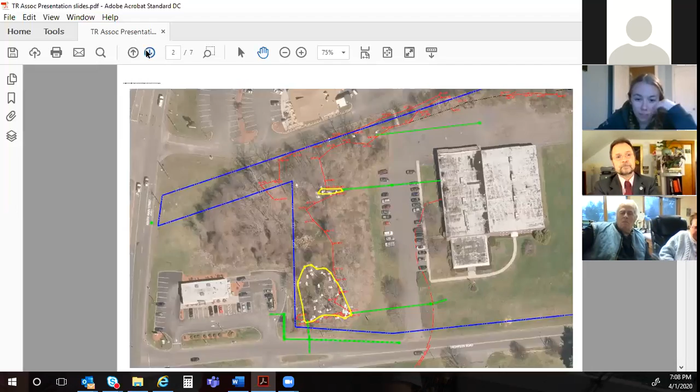I'm just going to interrupt for 1 second. Dick and Kathy, can you guys just mute yourself? What? Can you mute yourself? We're just getting some background noise. It could be the scanner. Hold on, please. Just mute it on the computer. I don't know how. I'm lucky to get on this stupid thing. At the bottom left corner, there's a little microphone. I didn't even know you could hear me. What kind of background noise, please? Why don't we shut the scanner? I can hear you guys talking every now and then. I didn't know we were on. Yeah, the bottom left corner of the Zoom meeting, there's a little icon that's a little microphone. If you just click that, it'll mute yourself. And then just remember, next time you start talking to us, just unmute yourself. Okay, we don't have that up here. I don't see it. We'll just shut up. Okay. You're diplomatic. Sorry, go ahead. You have to lower your cursor to a lower part of the screen.

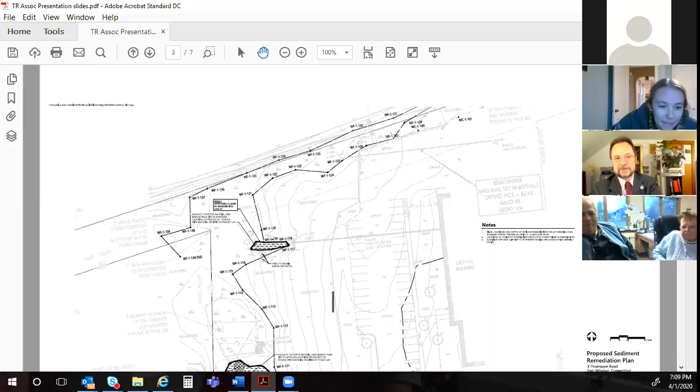All right, so continuing on here, this is sheet C3 in the plan set from VHB, and this simply shows those same 2 areas where we're proposing to excavate, and the patterning on the ground within those 2 areas corresponds to depth. Okay, so the upper small area is 6-inch excavation proposed. And the larger area ranges from 2 feet, which is the crosshatch pattern in 3 points of the triangle, if you will. A 1 foot excavation, which is the diagonal shaded area, and elsewhere it's 6 inches. So again, like I said, it's a classic pattern that geologists look for of deeper at the outfall of the pipe, and it shallows as you move downstream. And there's a couple of anomalies that you typically have, but nonetheless,

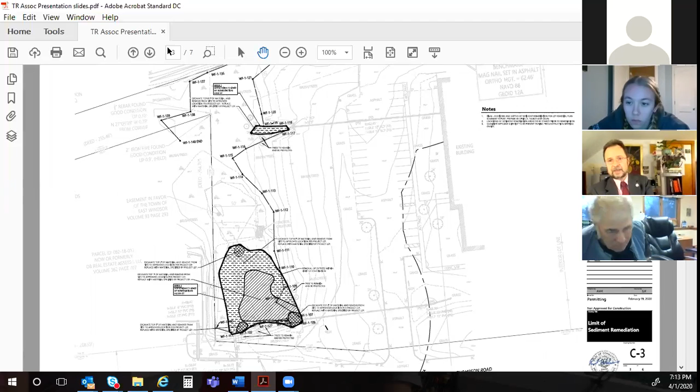And then finally, removing the erosion and sedimentation controls. So at that point, I'm going to end my opening comments and ask Jeff to continue, please. Okay.

So I'm Jeff Shamus with VHB. I'm a certified professional wetland scientist, soil scientist, and certified ecologist. And as Paul mentioned, I did the delineation out here. And if I'm looking away from the camera, it's because I have another screen where I actually have what I'm sharing. So I'm looking at the plans.

And so the delineation was done and is outlined in this black boundary. On this plan, this is a tree inventory plan. We've identified the remediation areas as well, the same locations. And so to understand what we wanted to do for mitigation, knowing that this was going to be all done in the wetlands and there was going to be tree removal and so on, I wanted to understand what trees were coming down, and I thought maybe the commission wanted to know this as well.

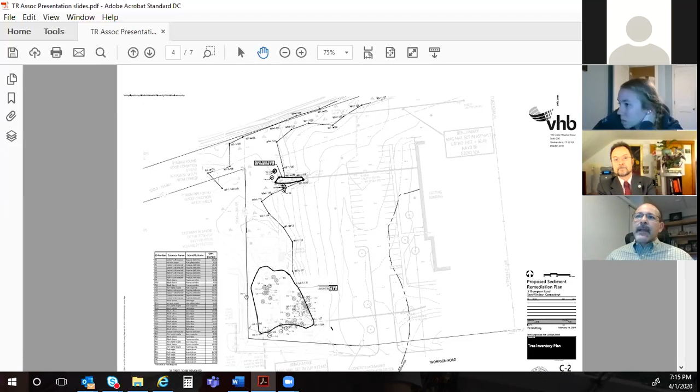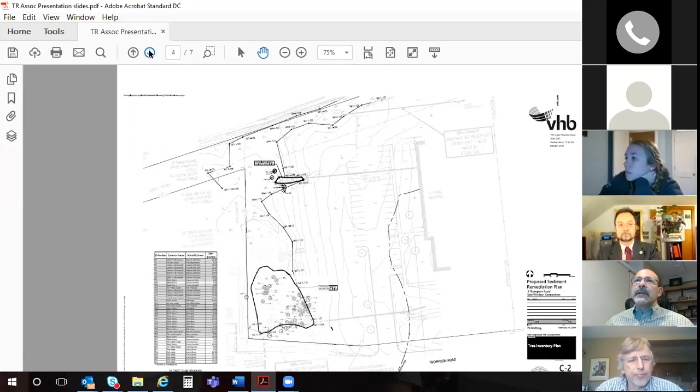So we did a tree inventory to understand the abundance and diversity of species, which primarily are willows, cottonwood, and red maples. There's about 35 in this location. There's also kind of an emergent small wetland area that I identified when I was out there. So in looking at the shrub species, I took all this into consideration. Up here, there are no trees in the wetlands that are coming down. It's pretty much an eroded channel and some scrub species, shrub species.

So in the planting plan, what we did was reforest the area, primarily with a similar makeup of trees that were there. And I apologize if the document's a little pixelated, but there's red maples, yellow birch, silver maple, and some black willows that will be in here for the trees.

The shrub layer will be about 80 shrubs that will infill here with a diversity of spicebush, silky dogwood, blueberry, and some arrowwood viburnum, which is a much better mix than what's out there right now. There's really not much of a decent shrub layer at all. And these will provide local avian species some food and cover throughout the season.

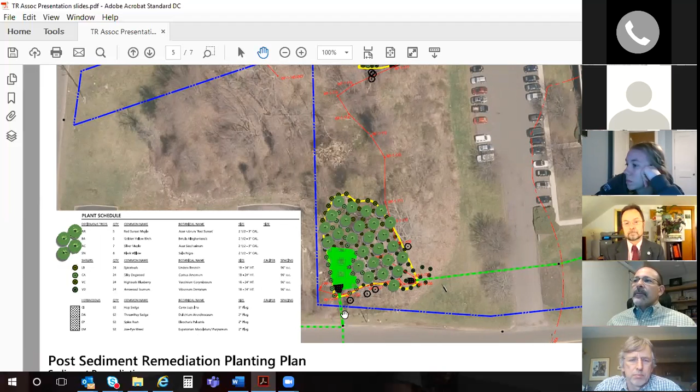And then I wanted to recreate the emergent area with a better diversity of emergent species. Those are going to be different types of sedges, some rush, and Joe Pye weed. And there's going to be about 200 or so of these plugs placed in here. So, overall, and then up in this, oops, I always do that. In this location, we have about 8 shrubs being planted.

And as Paul mentioned before, at this outlet of the drainage pipe, and then the outlet down here of this drainage pipe, we really needed to put a plunge pool of some sort because of the ongoing erosion that was being caused from the water discharging here. So there's small plunge pools, splash pads, if you will, to eliminate the ongoing erosion issues, as well as we put in a nice one here at the end because this pipe was pretty filled up, and we wanted to stabilize this during the process of the remediation to act again as part of our erosion control treatment method.

So along with the plantings and the restoration, I put together an invasive species control plan, and it's about a 5 or 6 page document that I submitted to Ruben yesterday. And in this slide, instead of going through every single piece of it, I really want to just highlight the points of the things that we really consider when going into these plans.

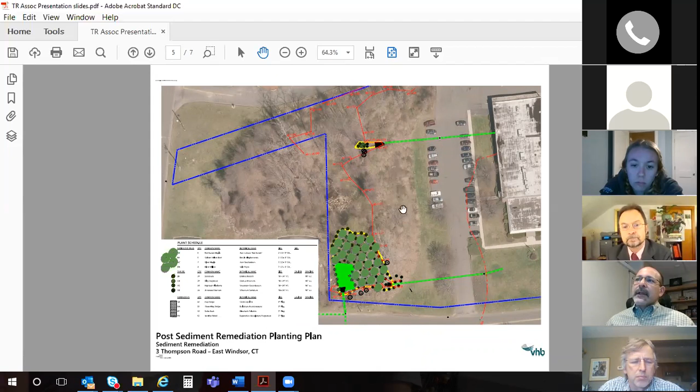There's some multiflora rose in this area, just before you get into the wetland, between this mowed landscaped area and this wetland transitional edge. So we know that there's going to be a population here that we'll need to watch out for in the wetlands. We're proposing to monitor, as Paul mentioned, for 3 years, and have a licensed landscape contractor perform the management

measures. And those measures that we've provided involve preventative measures as well as the actual control. So we don't want to spread the existing invasive species anywhere. If there's any fill or mulch material that's going to be used, it needs to be weed-free. And any invasives, whether today or post-construction, we don't want those invasive species to be chipped and spread on site. And then control measures are mechanical and chemical primarily.

I think what will work well, especially for the first 3 years, is being able to go in and either remove the small vines that might be growing, right down to the root, or cut and treat in the fall, because in the fall is really when you have all of the nutrients going down into the roots from the plant itself, getting ready for dormancy over winter. And that's when you want to apply the chemical control, because that will get right down into the roots.

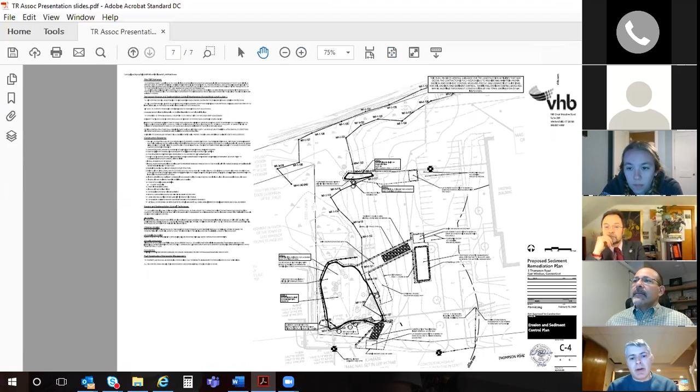Thanks, Jeff. Once again, my name is Paul Vitaliano. I'm a civil engineer with VHB, and I want to talk a little bit about the erosion control measures and construction sequencing that we came up with. Part of our primary goals were to minimize disturbance and to provide erosion control to make sure that we protect the resource that's there.

Before I get into that, I just want to talk a little bit about the feature itself. The wetland system itself, the northern portion of it, kind of functions as a detention basin. We looked through record maps and saw that that was the intent. And right about where Jeff is pointing to now, there's a berm that spans across that area. It's not functioning completely the way it should, because some areas have eroded, but there's a berm and an outlet

control structure right there. So when we saw that, we started thinking about how much water this area took, or what its intent was. We wanted to respect that and make sure that we understood that we needed to mitigate that in some fashion. The reason I bring that up is because it played into our construction sequence.

The first thing we did, obviously, is establish perimeter controls and identify the areas for contractor laydown and truck access points. That's where you'll see the two, there's that one and one further north. Those are crushed stone areas for the trucks, so they're anti-tracking pads. We've defined those areas with silt fencing, and you can see the silt fence pretty much go around the wetland.

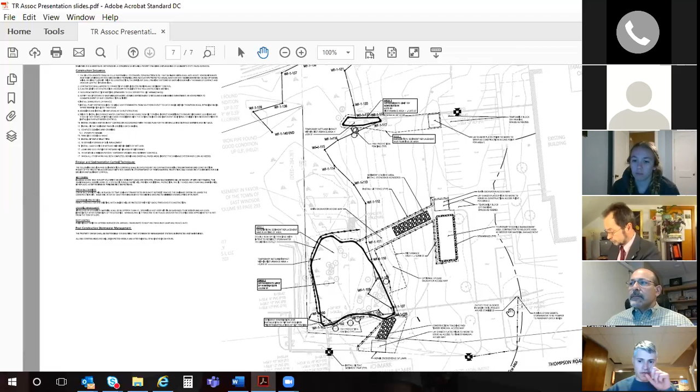There's sufficient area for that. You could see the contour there. You could inundate that area for a pretty decent amount, about a foot, foot and a half. So we feel that that is plenty for the type of storm that you would have during this dry season. And in the event that it does rain, the pump would be installed and a hose would be installed right there where Jeff's shown, going to the catch basin. So the water would continue where it typically would. It just would not go through the work area.

So by doing that, we feel that we've isolated the work area, given ourselves a drier area to allow us to work faster and more efficiently. Some of the other sequence issues that we considered were, after we established these controls, to do remediation and then to install riprap at the outlet. And then at that point, we would move into the grading exercises, which is basically restoring everything to the existing grade, installing the plantings, and then when everything is established, we would then remove the erosion controls. And that was pretty much our thought process to minimize that disturbance. And that's pretty much it in a nutshell.

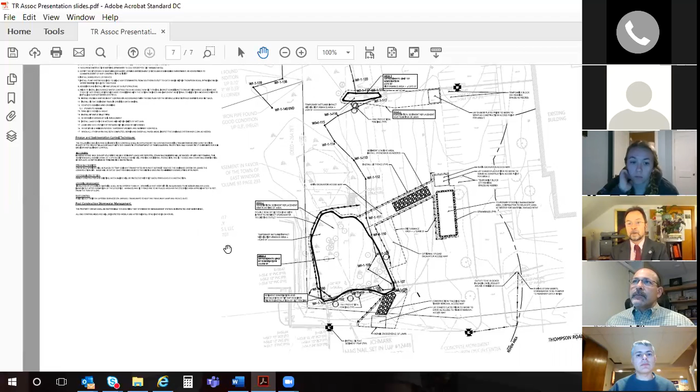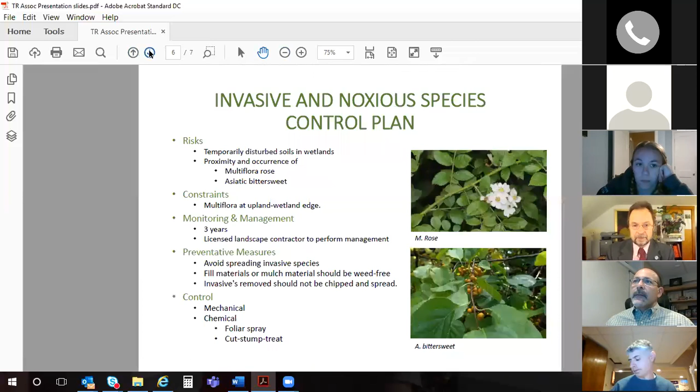All right, well, I'm going to continue on then. I just had a couple of points. Jeff, if you could keep that same plan up, if you wouldn't mind. In the early phase after the installation of those diversion controls, the lower area shown just to the left of the hand icon there, that's going to be where the timber is going to be harvested from. So one of the initial steps will be to cut the trees, and that one access point is for loading logs and removing them. And then, like I mentioned earlier, the other rectangular rumble pad up there, riprap, would be for trucks to be able to back in and be live loaded.

And then we do have the polygon just to the right, which is actually for clean fill, because again, we're not envisioning stockpiling impacted material; that would go right in the truck. So we just feel like we need a staging area for clean backfill and whatever else right there. So I just wanted to point that out.

And as far as timing goes, the northern excavation area, we didn't feel like that's really more than a day of actual excavation and restoration activity, and we would time that for when we know there's no rain forecast, say for 2 days. So there really isn't any robust planning for stormwater management there, because it's not going to be necessary. I think the material coming out of there was maybe 30 yards, I forget the exact amount. But the more southerly area might be in production for a week or two. So just to give you a sense of what we're thinking on construction duration.

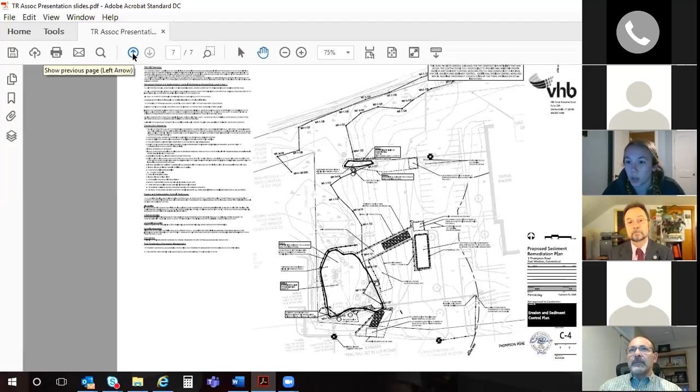Appreciate that. One thing that I was thinking about was, would it be possible to get the drainage, the soil analysis and everything that you do with DEEP, just so we have those on record when the project is done, to say that it's clean, it's remediated, etc., that the project is complete on your side. And then for your 3-year management plan, again, if we could have those for the record, just to know that it's been maintained correctly and we have those reports, that would be also very nice.

Yeah, I'll speak to the first question. Yes, absolutely. Coming into this, I have, I don't know, 1,000 pages of actual chemical data from the close to 200 samples that I have. So I chose to keep the presentation to this body simple and to the point. But certainly we will copy your commission on the remedial completion report, which will have the pre-remediation data and the description of how we did what we did, and then we'll have the post-excavation cleanliness sample results, for lack of a better term. So yes, we will do so.

Great. And Jeff, did you have a comment on the second question? As far as what sort of deliverable do you offer? Is it like an annual summary report or something? Yeah, we would issue kind of an annual monitoring report, which would identify when we were out there, what we found, and a recommendation of what should be done. Thank you.

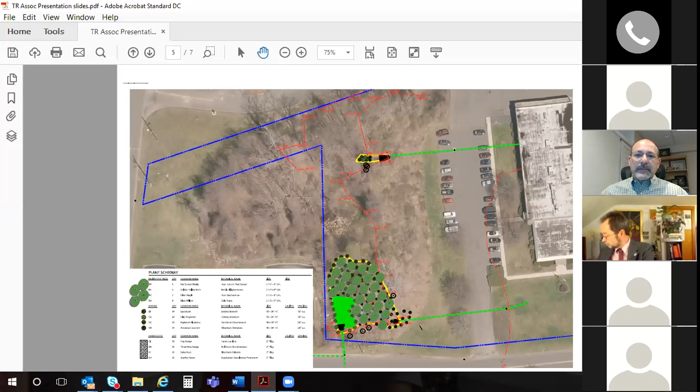This is Jamie Storiak, and I agree with your letter dated March 31st to Ruben, and you outline your invasive and noxious species control plan, including how that might come to fruition. And I think it's great that you have outlined all of these details, including the time frame and how the contractors might do that for us.

Yeah, it's important, but I think, you know, to basically close the loop so that you know it actually got done each year, we should probably memorialize that in a report that we would submit, right? Yes. Okay.

Jeff, this is Kurt Kepschel. I'm sort of new to this, so maybe you can give me a science perspective on this. When you dug down, or you proposed to dig down 2 feet, is that when you did the soil sample, was that the greatest depth where you found the copper, or is that a conservative depth so that you get everything? Yeah, I'll answer that.

So that 2 foot is where in certain areas the copper ceased to be at high levels, and then we have data to show it's clean thereafter or deeper than 2 feet. And, you know, it was interesting, the data clustered. So we have multiple test borings fairly close together that showed the same general pattern. So we ended up lumping them into dig areas at certain depths. So hopefully I'm answering your question. We have data beyond the 2 feet that shows it's clean.

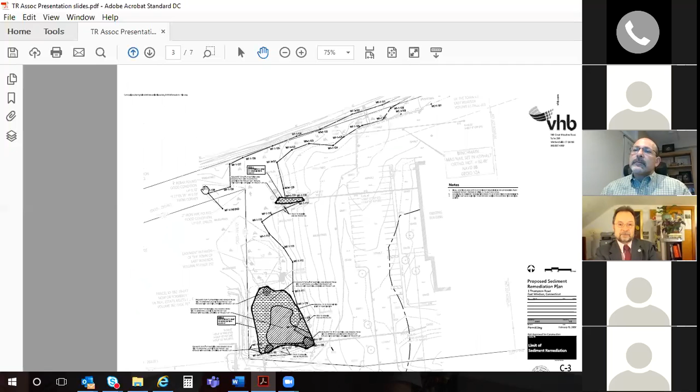No, thank you very much, and this has been an informative presentation. Thank you very much. It was very obvious, even to the untrained eye, where the stuff is and where it isn't, and it is not elevated in copper at depths below 2 feet. And where we're proposing to dig to 6 inches, the data from those areas does not have elevated copper below 6 inches. So it varies as geology always does. But we are looking to exhume material that exceeds 50 parts per million.

We're intending to have data at the tail end of this to demonstrate adequacy of that plan, and with hard data to show that it's clean once we're finished. Thank you. Yeah. Are there any other questions from the commission, from the board? No.

The only thing on our remediation plan for the invasive species would be, as Jamie had stated at the last meeting, to make sure you do it early enough in the year before the invasive goes to seed, so we don't end up just replanting the invasive back into the soil for next year. Agreed.

Okay, any further discussion? Yeah, I was just curious if the applicant is okay. This is Alan Baker, member of the commission. On the draft permit that we'd be approving tonight, there's an additional condition listed that would be to follow the recommendation of the town engineer from his memo dated March 2, 2020, that a representative of the Public Works Department be invited to the pre-construction meeting because they want to make sure the road is protected. Is that something that you guys are okay with?

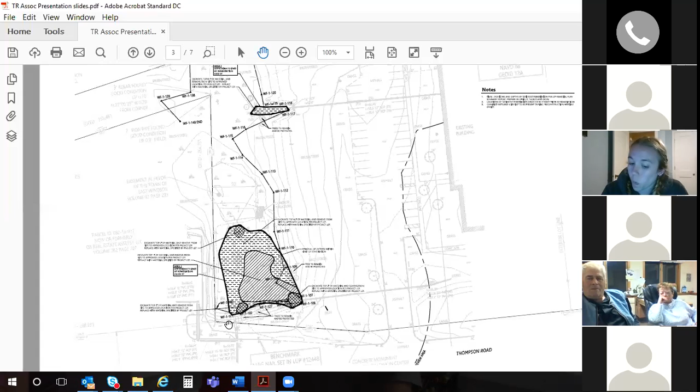Alan, have we done that in the past where we request the final documentation, or is that just? Well, I mean, we've had that, like I think Newberry Village, where it was part of the conditions that they had to supply us with a report. So, I guess it's best to put it in writing. Okay. We could add that as another condition that we get the post-construction.

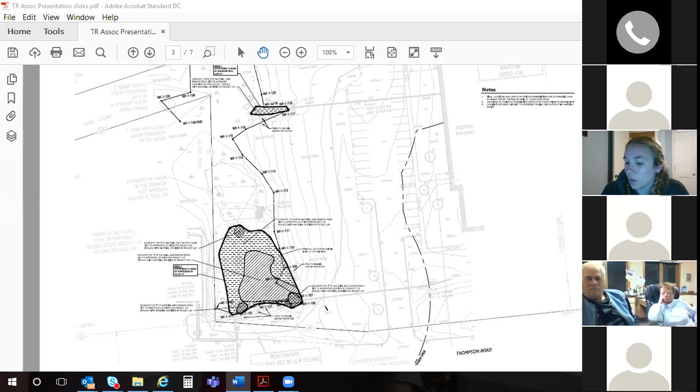I think it was Jeff that was telling us, what's the name of that report? It's going to be an invasive species monitoring plan or invasive species monitoring report. So Dick, do you want to amend your motion to include an additional condition for them to supply the invasive and noxious species control plan post-construction? Absolutely. I think it's a good idea. It keeps it all in black and white. I amend my motion.

Jamie, do you still want a second? Yes. Okay. Any further discussion? All of those in favor? Aye. Aye. Aye. Dick Pippin, aye. All right. Al Baker, aye. Motion is approved, and you guys are all set.

Thank you. Thank you. Presentation. Thank you, guys. Take care, everybody.

All right, so to continue our meeting with old business, we're gonna hold off on the violation and citation ordinance and the fee schedule. Did we want to discuss the application process, or are we good to just leave it where if something comes up and time-wise everything works out, we hold a special meeting the third Wednesday or whenever is possible to move applications along instead of having it every month? Is everybody okay with that?